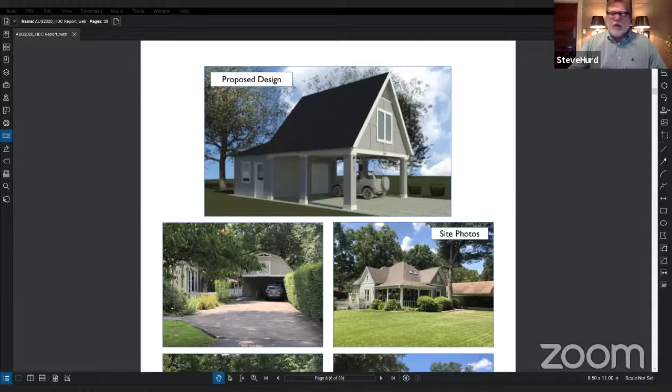Yes, we're here. Okay. This is Zach Hendricks and Bruce Hendricks. All right, so just your name and address for the record, and then tell us what we got going on here. I'll use my address, Zach Hendricks with Hendricks Remodeling. My address is 1103 Watkins Street. I guess our shop address, 1210 Hogan Lane.

That's fine. All right. Yeah, go ahead. You're good. You want to tell more about it? Yeah, just a brief overview of what's going on. This is for the public record. We've got our copies of stuff, but just give us an overview, and we'll discuss from there.

Well, Mr. Gendrich called us, and he had several things going on. One, he didn't like the way the barn shape looked, and it's been there for a lot of years, maybe 30 or 40 years, and it's also failing on the underside of the part where the cars are. It's sagged down about 5 or 6 inches, and they've had various methods of trying to prop it up over the years. So he wanted to rework the roof part.

The sides are made out of an I-beam on top of posts, and they will stay. The idea is to make it look more like the house and the surrounding area that's there. The reasoning behind the steep pitch roof is that there's a building in the back, well, they're all attached, it's all kind of one building, but there's a different roof on the back. It has an odd hip shape. And the rafters are the ceiling.

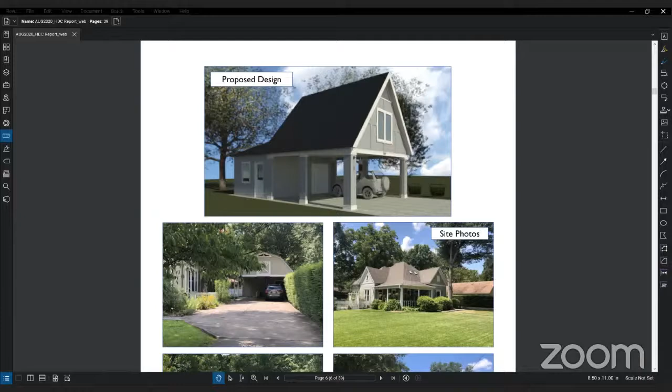Well, do y'all have anything more to say to that? Either one of you, Mr. Hendricks?

No, I think that pretty well covers it. And that's good. I mean, I'm not trying to get anything out of you. I just...

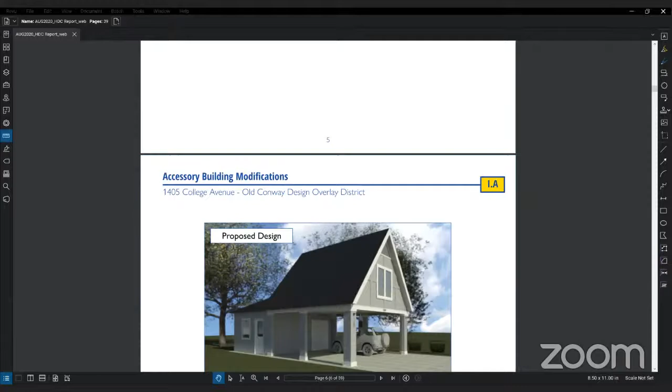James, do we have any public input on this project? We do not. Okay, with that said, then we'll discuss it. We may have some questions for you guys, so let's hang on there.

I want to say I've driven past this property. I've been here 28 years, and every day when I drive by there, it's been there - that little barn with the gambrel roof that never fit. So to me, just personal opinion, design-wise, I think it works. If you look at the reading of all the different items, it's clear that if you built it new from scratch, it wouldn't go, but it's been there. They're just refurbishing what's there, so it doesn't have to adhere to any of the zoning problems it would come across otherwise. So it's nothing better than what's there, in my opinion. But does anybody else want to say anything or add to that?

No, I don't have any discussion. I'll actually motion to approve with the staff recommendation.

Mr. Hendricks, did you all see that as far as the mechanical equipment goes, it was going to be placed in a spot to minimize the view? Yes, we have a question about that - what mechanical are you referring to? Just if there is any, it's one of the boilerplate ones that if you're going to have any, make sure it's not out in the driveway or something like that.

That's fine, no problem. If you don't have any, it's not an issue, it's not a discussion. So like I said, I motion to approve with that recommendation.

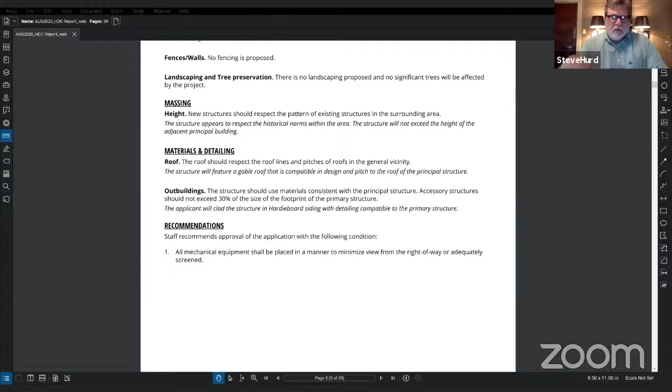That's fine. James will deal with the COA, it'll be available, I guess, tomorrow, James. Yeah, we'll get that issued. Okay, so the permit can come with that and you'll be good to go. All right, thank you all, appreciate it.

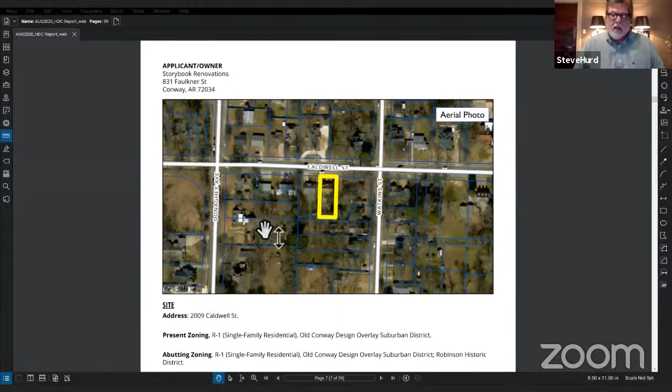Okay, next item up is exterior modifications and addition to 2009 Caldwell. I think I saw Niki gave us a comment, although she's here. Are you available, Niki?

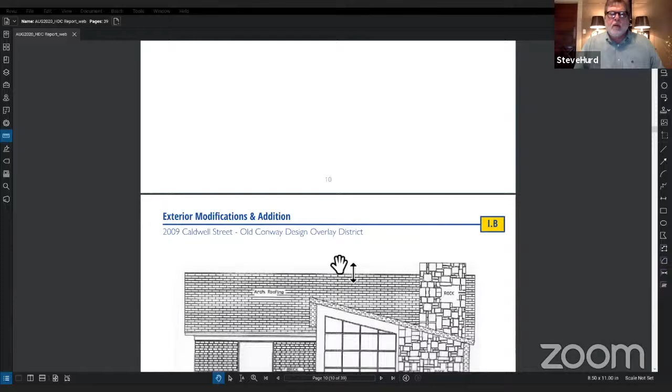Are we hearing? Can you hear me? Yes ma'am. Okay, yes I'm here. All right, just your name and address, like what you've done many times. Okay, Niki Thompson, 2759 Carl Stewart. All right, give us a little synopsis of what you got going here.

Okay, so the big thing I'm asking for is I'm wanting to do an addition off the back. Currently it's a 3-1, and so I'm wanting to add on a master bath and closet. To the front, I'm really just wanting to clean it up, take the dinky shutters off, power wash, and put a new front door - it'll be in the same spot.

I was asking if I could do a new window on the front. I truly can take it or leave it, it's just kind of an ugly window. Which window, Niki? The one on the... y'all want to keep the feature window, but yes, that one right there - it's just an old aluminum window, and it's in a prominent spot. So if I could replace one, that would be the one I'd like to replace.

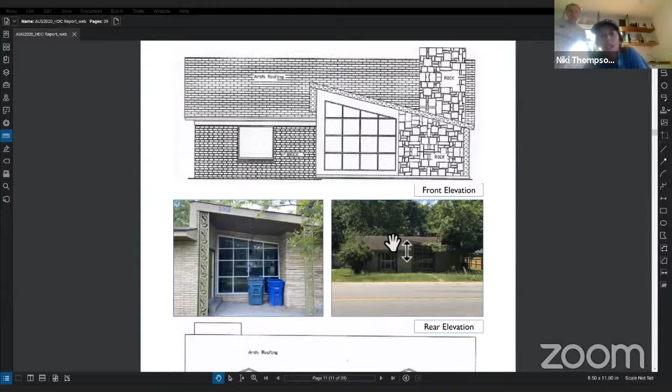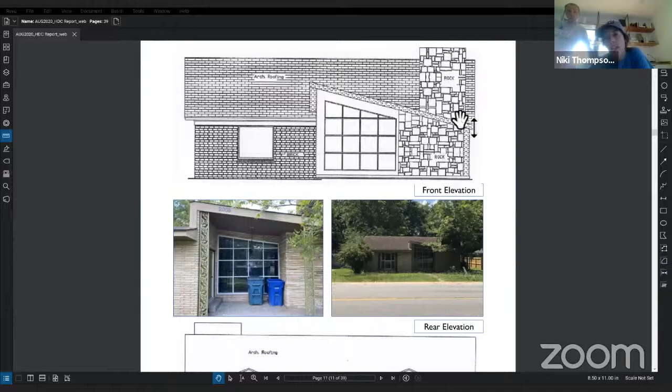And then also on the front, I want to take down the metal posts. And then, it's all rotted underneath and over on the right by the chimney - the porch is just rotted. I would like to replace that with some wood underneath, and then have it waterfall down the side on the right over there by the chimney. I have a question on that.

So will the front porch be walled in on 3 sides when you get through? I'm not real clear on that. Okay, yes, I guess it would be. Your 3 sides being the door, the window wall, and then the west side of it.

Are you wanting to put columns back? No, I'm wanting to just take them off, and it'll just have that feature from the ceiling down onto the right side. Okay, good. Then we won't be arguing tonight.

Those columns were put there by salesmen running around in the 60s, maybe late 50s, telling everyone the wooden columns were rotting, so put these up. I'm sure that came from a slick salesman, and there probably were no columns there at all to begin with. Yeah, I don't want columns.

I'm also wanting to take that lean-to off. The lean-to, the carport. I don't think it's a carport because there's no room to get under it. Yes, that right there. That was probably added at some point, wasn't it? I mean, that's not original.

So we'd end up with the east elevation just clean like it is on that drawing right below it. Yes, so in that drawing, it shows that I'm removing a window. In the back where I'll be busting through to do the addition, I'll use that brick to fill in the window.

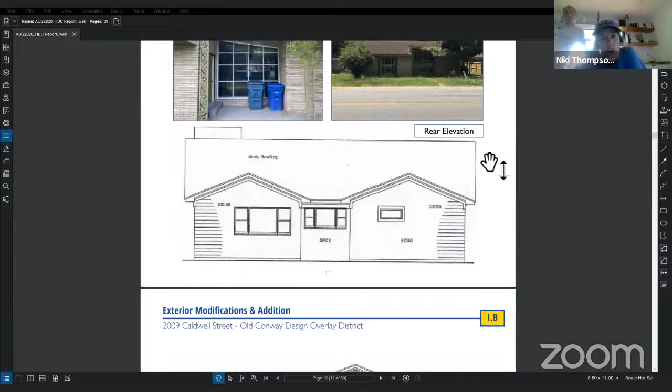If you go back down, keep going right there. If you look under the current lean-to, you can kind of see there's another window there. I'm going to close that one in.

Why are you closing that one in? It's going to be, there's going to be cabinets there. I'm extending my kitchen. Is there room to put just lower cabinets under that window? No, the windows are too low.

You can see that window there. It's pretty big. Yeah, it's a small window. You can't see it, the post is blocking it. The one you see, I'm keeping. Is it the same size as the other small one to the right there?

No, it's as tall as the single of the double that you see in the elevation below. Right, it's like a single. That little single one down the way, though, is it like that? Is it that size? No, because it's as tall as the one. Oh, I got you. So that other one is currently in the kitchen, and I'm going to keep it.

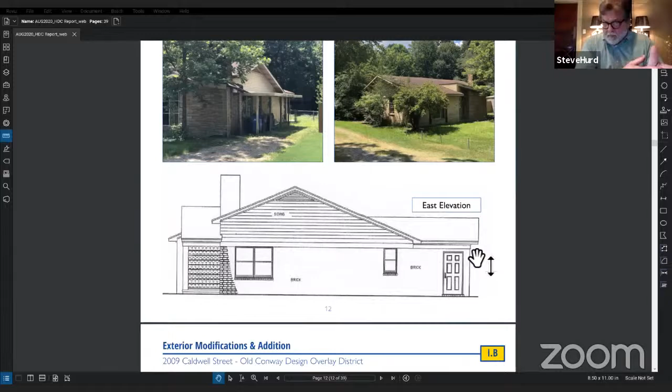But to keep that other window would interfere with the kitchen layout. I think personally, taking it out and replacing with existing brick is kind of clean, as opposed to making them put in another window shorter to match that other one on the right. I think it'd look more jumbled doing that because the windows wouldn't necessarily match. I'm not saying it's not losing a window and that it's not the greatest, but it's not going back with some odd material that's not there or that we'd have to have now. It's using existing brick, so I'd say it's kind of the best of what we could get out of doing something there.

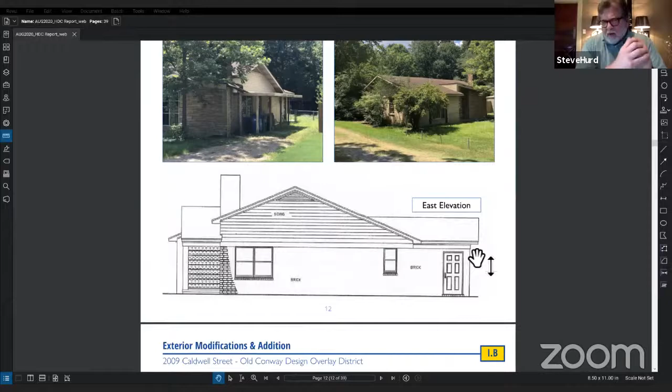Personally, from a design side, it'd be great to leave everything like it is, but I'm not sure it's a horrible thing to lose, and it's down the side of the building. I know we're losing the overhang and any shadow, you can probably see it better now, but I'm not sure how that affects the overall look by losing that. I'll fight for other ones to get taken out, but that one I'm not sure it's as much of a fight as we need.

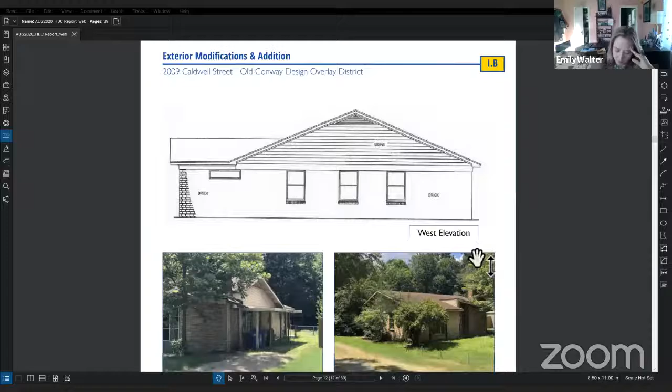I have a question about the waterfall. You know how you're going to waterfall that roof line, what is that going to look like? I mean, is it going to be wood? Yes, I'm wanting to add in a cypress, just a clear cypress, to kind of give it a little bit more of that mid-century vibe.

Is it going to be laid horizontally or vertically? Horizontal.

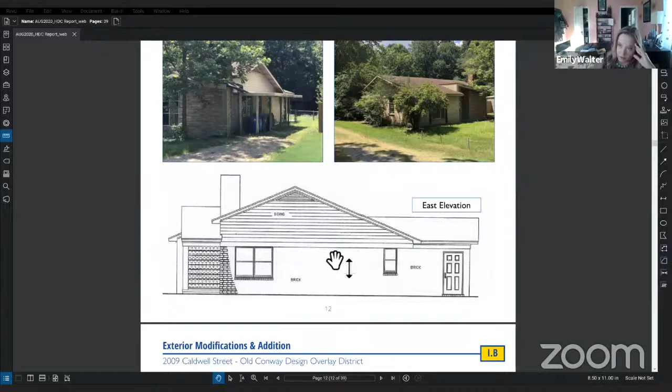And I'll throw my two cents in about the window replacement in the front. I don't mind this single one because I feel like that's going to accent the other window a lot more, right? Which window are you talking about? She's saying she wants to take out the left window and just do a single pane. Am I understanding that right?

Yes. I kind of like it because the grids don't fight with the center window now. And I was hoping to do just a single, or even fixed glass, because there's another window in there for egress in that bedroom.

Would you be raising the sill of the window? Because am I seeing on the elevation, the photo, it looks like it goes down almost to the floor. It almost does. So you're raising the sill of it with this? No, I would just keep the same existing hole.

Okay, and I truly could take it or leave it. I think it would look better to replace the window, but if I need to save money by not replacing it, I will.

I guess my thoughts, not to argue with you, Emily, but going from something divided with that big of a hole in that kind of small space, it's going to be a big dead hole without some trim, without the mullions, and it's going to look commercial. That's fine on a commercial building, but even if I were doing a little clinic or something with a window that big, I'd put mullions in it because it's such a big expanse.

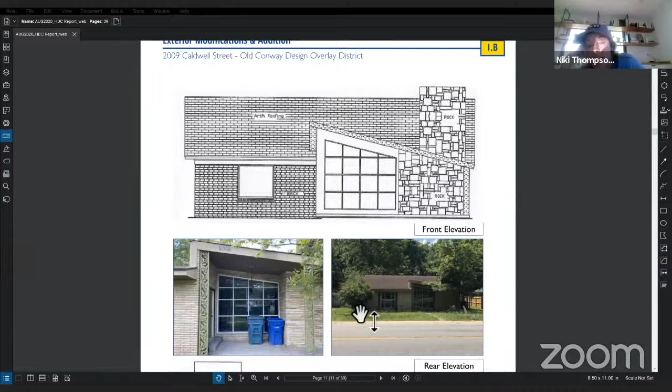I don't know. Again, I'm fine to keep it and just say, hey, I wasn't allowed to change it. But if I've got someone who really wants to change this window, or use it as a marketing tool -- it's an original window, it goes with the house. I'm being a little silly, but at the same time, it's going to be hard for it to look like it goes with anything else you do. A regular double hung window, or a pair of them, still won't match that style.

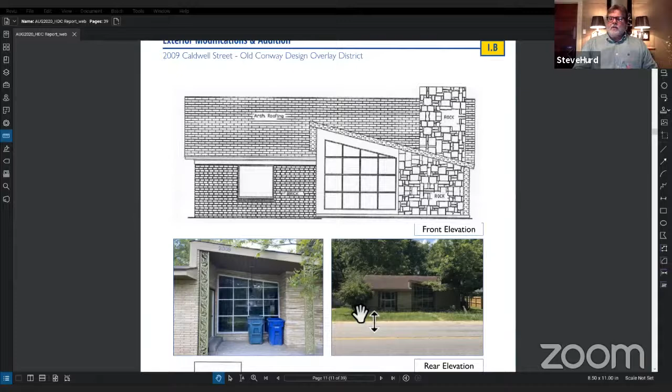It's in a very big style house for that era. Yeah, absolutely. It's a handsome little house for that era, and we don't have many like that around. Right, and I'm thrilled to kind of start poking away at it.

I'm moderately leery of the waterfall thing, but that's not something that kills it for me. I'm okay with that, just as we talk about design parts, but for some reason that window would kind of deaden the front if it went to anything but broken up like it is.

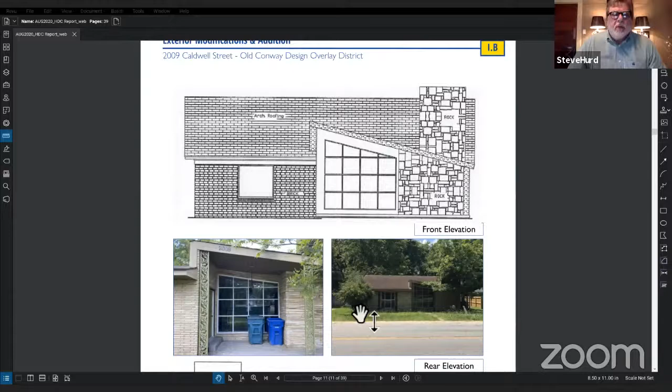And I don't know if they're trying to line up -- if those mullions line up with that big porch, that might have been an attempt, but I can't tell from here with the picture. Well, that's fine, we don't need to. We can move on, I'll just keep that window.

Okay, all right. I will say, like you said, you're moderately leery about the waterfall. I'm very leery about it, to be honest with you.

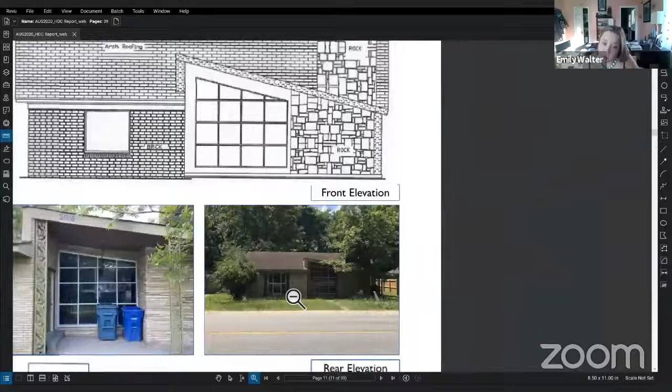Whenever I heard that somebody was buying this, I thought, oh my gosh, I hope they don't change it. It's such a unique house, and it's one of a kind. And I'm not crazy about changing it.

So let me just say that when I saw the house was up, that something was happening to it, I was like, oh, I hope it's Niki. I know that if anybody's going to do this house justice, it's going to be Niki down in Storybrooke. I know that the waterfall might be a little bit intimidating, but I feel like it fits with the time frame that the house was originally built, and it also will fit in updating the neighborhood and giving a fresh vibe to what is already a really rich street in Conway. So I'm all for it.

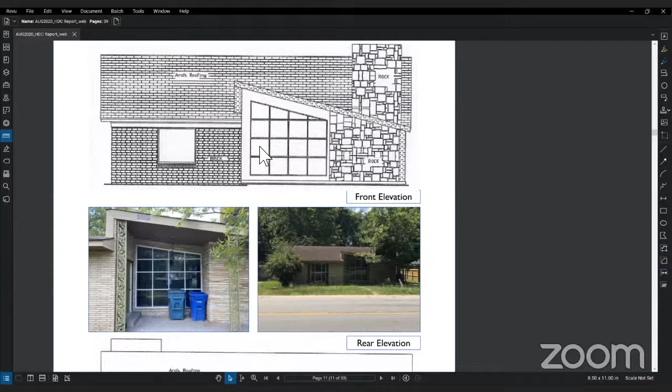I speak highly about Niki and her work and all the things she says about this house, I'm excited about. Well, Emily, I kind of lean towards Liz a little bit on that opinion. The two parts that could change on the front of this house: one is the window, one is the waterfall thing. If the waterfall is there, it's continuing a shape, a flavor, if you will, that's there, as opposed to putting a little handrail at the end, just a porch rail that defines the porch, which could be done and not look like it's supposed to. That's not totally out of line, in my opinion, and I think Liz's too.

Breaking that window out and putting something contemporary now would look really out of place. My opinion is that the waterfall is in the appropriate range of continuing the design style.

I agree. That's why I was asking what direction it was going to face. I agree with all of it. We need to make sure - we don't want to say okay on something and have it happen where we didn't quite understand what was happening and it comes back to haunt us. But I think we're on the same page.

Does everybody agree? I have a question, and this may be a stupid question. When you say waterfall, are you talking about an actual waterfall, or is this a term for something else? Just a term for something else.

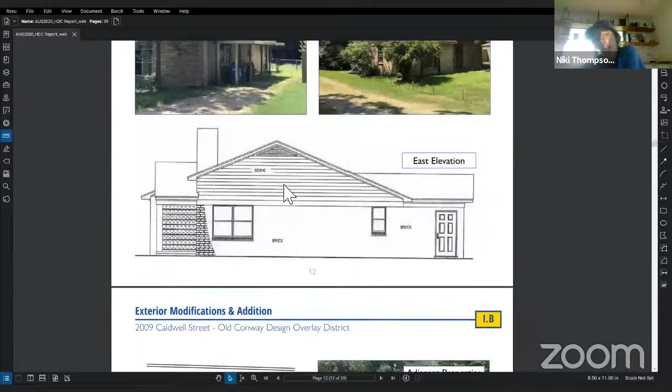So the wood - I'm sorry, I'm having a hard time describing it - will clad the porch ceiling in that same monoslope that's currently there, and then it will just continue down the side on the right. Okay, gotcha.

Margaret, if you look at the front at that porch - I can't scroll, keep trying to scroll the drawings - the porch that's there now with the columns, but on the left side of it angles up, then turns sharply down. She's going to basically at the other end angle down and turn sharply down with structure, with a wall. Is that right?

In that picture to the left where you see the two metal columns, it's almost like I'm going to run horizontal panels across those. So it'll just waterfall to the ground.

I wouldn't mind seeing a clearer drawing of that, if it's not too much trouble. Is it showing up and we're just not seeing it in the drawing? Well, I attempted, and I don't think it made the drawing or this form. I attempted to, and then the draftsman - that is his attempt. I can try to find something on Pinterest, but I don't know. I think I've just seen it in my head. It looks really good in my head.

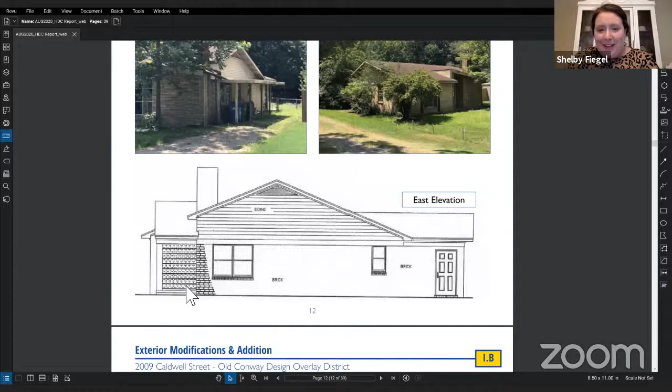I have lots of good in my head too, Niki. But I guess the best way to see it is above, where it shows the front elevation of the house with that draft drawing. You can see where the roof runs, and then the same material is used to drop down kind of to make a wall. It's in the draft, I just think, like you said, it's not coming to life the way that we probably want it to.

Well, the only thing that I worry about, especially if we're taking that wood to the ground, is that we make sure the wood is - and this is my detailing coming to light - not put in jeopardy when it comes in contact with moisture and stuff. That's all I have to say about that.

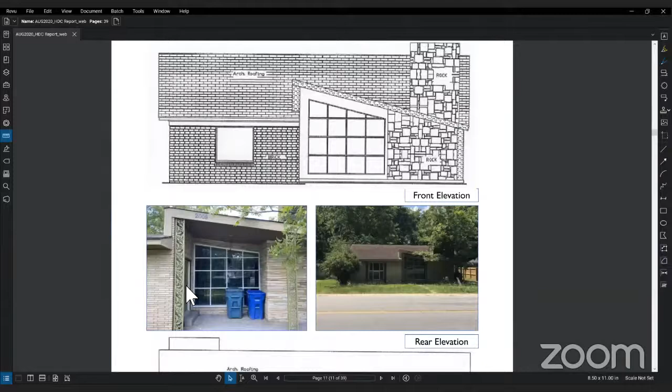Yeah, I thought about that. This is crude, but can we see that? Is that what you're talking about doing, Niki? Yes, sir, yep. Do they see that?

That bold line, the bold thickness, that's the roof going down, and she's going to turn exactly down that way. Is that right? Yep, that's exactly it.

That didn't seem too hard. Is everybody clear on that? I can show you that picture again, but that's what I was seeing. I'm glad to know what it is.

Niki, I wanted to clarify, so you're not proposing any columns on the front? That's correct. That's what I was going to clarify too, James. So that eliminates staff recommendation number two because there's no new columns.

Let's take it off so it's not confusing. Can I make a motion to approve with staff recommendations with the exception of striking recommendation number 2? The column recommendation, that's number 2, is that right? You're right. Okay, yes, I make a motion to approve.

Okay, I have a motion. I'll second that motion. I got a motion and a second for that amended recommendation list. Just real quick, Niki, you've seen the recommendations, correct? Yes, I had questions too because I wondered if they were for me because of the columns. But I think everything else is fine, except I'm not doing number 4, replacing a window on the right elevation.

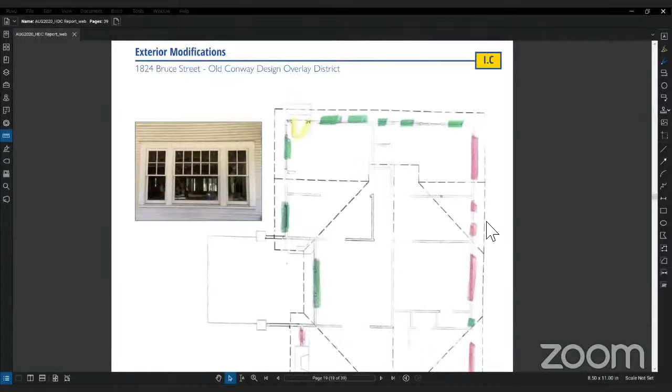Okay, that's fine, didn't know you were living at the house. All right, so the exterior modification, I think you guys have probably all taken a look at it. What we're here tonight to talk about is the windows we are going to be replacing and moving the front door to the right, the original front door.

Why are you replacing the windows? Well, there's a couple of reasons. They are pretty deteriorated, and they are not energy efficient at all. And at this point, it's just the back and part of the side.

When you say deteriorated, what is that? Have you had anybody look at them to repair them at all? Yes, and part of it has to do with the interior remodeling of the house.

Just when I had the architect do the new plans, we needed to make some changes on the window locations.

I drove over there today and I didn't notice any deterioration on the outside, so that's why I was curious as to why you were changing them. They're just so pretty. Well, none of them are being changed that you see from the street or the driveway. That side is pretty visible though.

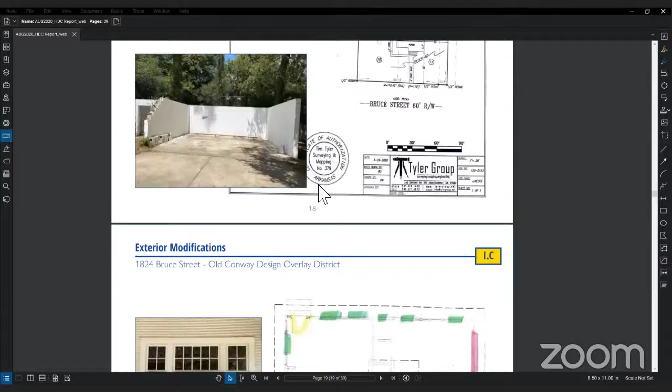Well, I don't know if you're looking at, so the pink is where all the original windows are staying. That's the driveway side and the front of the house. To clarify, the driveway is on the right side of this drawing. Oh, the floor plan, okay.

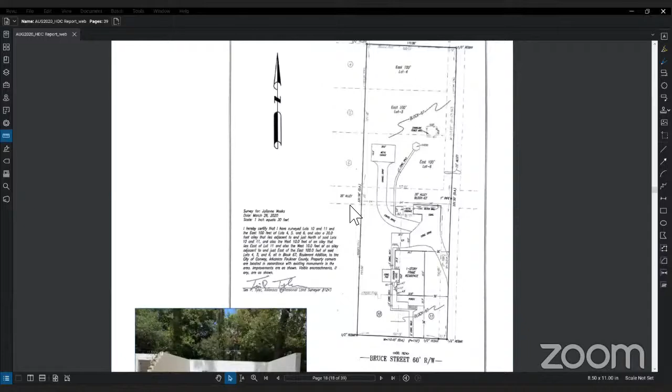Windows are a discussion point, but also just to add in there, why is the door moving 2 feet? Well, it's really moving over a little, as far as basically the size of that door, which is 30 or 36 inches. It's just to center it, and also with the floor plan modifications, it better fits in the room.

Is the plan that I'm seeing the floor plan that's going to be built? Is that going to be up against a wall I'm seeing? Let me go back and let me see the picture. Yes, it'll be to the right of the wall, so it opens onto the wall.

It just seems to change the front of it, which is a handsome house, and then just to scooch it over less than 2 feet or so, I don't know, that's a lot of suffering for a little bit of floor plan thing inside.

Well, the floor plan, there's kind of an entry, it's still an open room. In fact, we're adding kind of like some craftsman little columns there to the left, and it makes it more livable.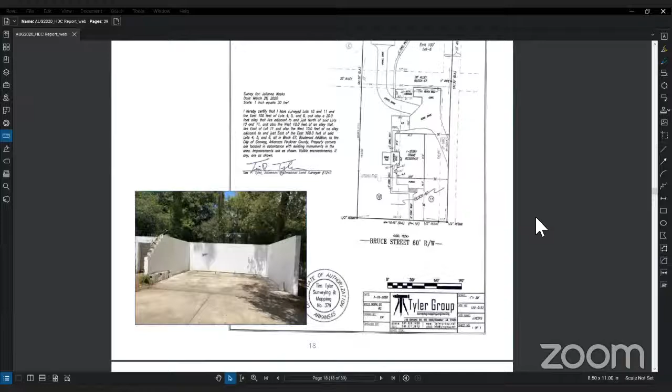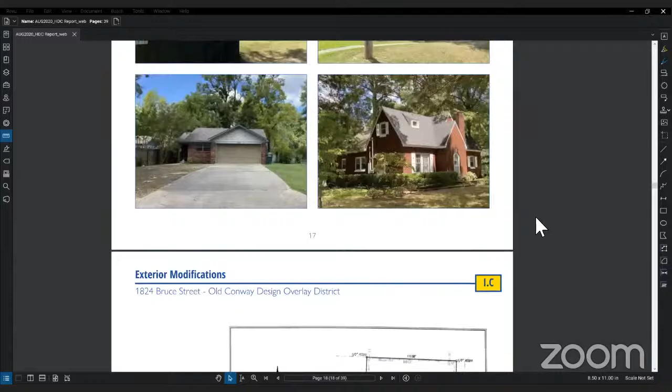Because what you're actually seeing there on that floor plan is not the floor plan, that's where some of the original walls are right now. That's what I was asking, I couldn't tell, sorry, I'm looking at that.

Okay, not to bounce back and forth, but back to the windows and energy efficiency. If that was our criteria, we'd have to rip out every window in town, in the old part of Conway. But they can be repaired and be very efficient, the single pane doesn't mean anything as far as efficiency.

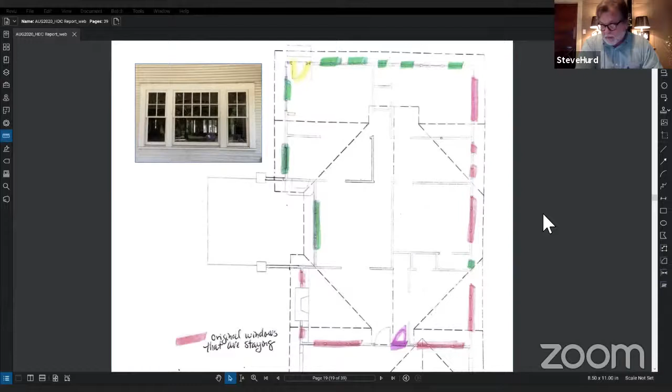But have you considered storm windows? And I don't mean big clunky aluminum storm windows, but I know there's a couple of different people in town that actually will make those, and they're priced very competitive with even just replacing windows.

So I don't know if you can see the back, there's a picture of the back of the house, and this house has double hungs and casements. The double hungs are actually in great shape.

The casements on the back of the house, part of that is a floor plan change as well, where you have the little bitty short windows that were over a kitchen sink, and that's not going to be a kitchen anymore.

Is that the photo? I see a photo with a dumpster in the foreground, is that ones there? No, those are all staying, all the ones you see with the dumpster are staying. The picture with the 4 little windows.

Well, okay, so in the back, it's the back of the house that you can kind of see where a deteriorated kind of carport is. Yeah, it's our first picture at the upper left. Yes, that's the one, I got you.

Okay, so those 4 windows underneath it, under the carport, were over a kitchen sink, and that's not going to be a kitchen anymore. So we're putting larger windows there to open toward the back. This has a beautiful lot in the back, and you really can't see it right now from the back of the house.

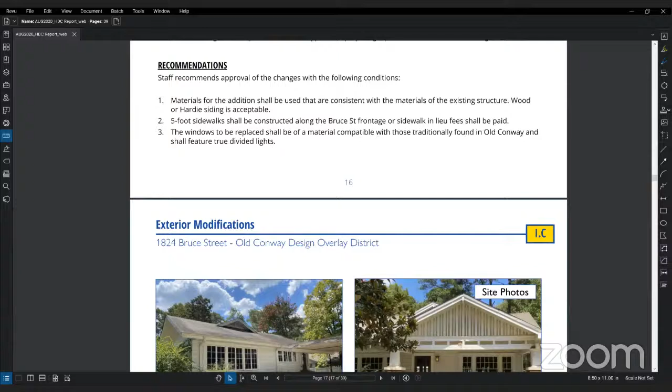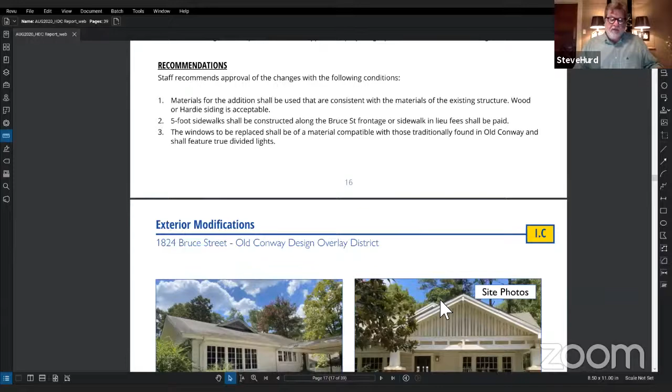Okay, all right. Next item we have is the new single-family residence on 517 5th Street. Do we have anyone here to speak to that?

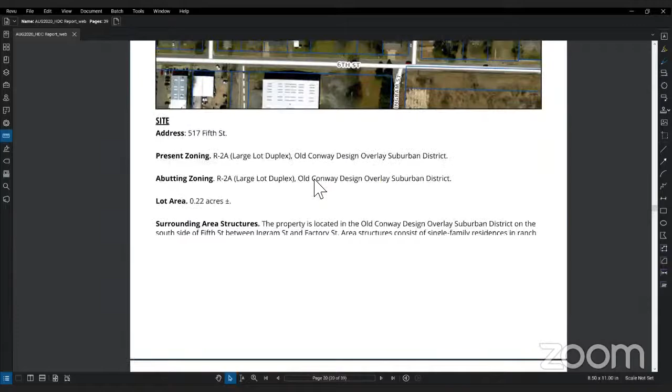Yes, we're here. Can you hear us? Yes. I'm Holly Strangland. We would like to build a— let me interrupt you, I'm sorry, I apologize. I got to do your address where you live. If it's at 3035 Crawford, that's fine. Yes, 3035 Crawford here in Conway.

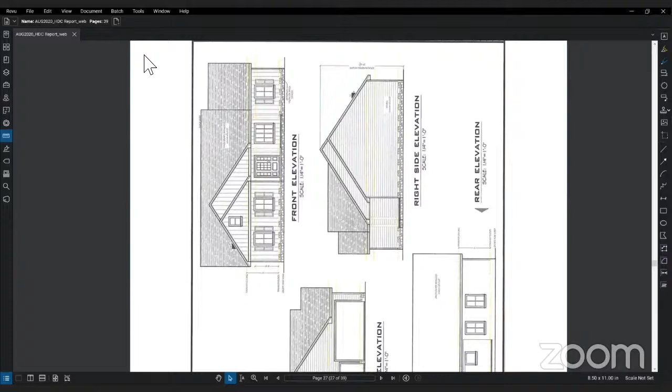We've read the recommendation, so we have some questions, some confusion. I don't quite understand the garage issue. It's a side entry. You can't really tell from the front of the house on the elevation view that there's a garage there. You would only be able to see it because of the driveway.

Well, I will say just from design and layout, with the garage up front, side entry or front entry, you're going to have a whole lot of concrete. First off, you're going to have a big apron to turn into the garage and back out, and a wide driveway coming up to it. When they're set back, like a multitude of homes historically have had, if they had a garage or carport in the back, it was a narrow driveway back to where things were parked. So while the garage is there out front, the door is on the side.

What comes with that is a large landing strip and pad that we're trying to avoid—those exist already, a lot of them, before we came along, as far as trying to maintain the neighborhood that's been historically around. They're built a lot out West Conway, lots of subdivisions, that's what they've got, but we're trying to hold to kind of the historic standard with that. So back, halfway back of the house or further—it could be a straight driveway into it, but you start out narrow and get back to the pad further back. That's one of the reasons we push it back, to keep all that concrete down. Well, a lot of the homes in the area don't have garages, they have concrete parking pads, tons of concrete.

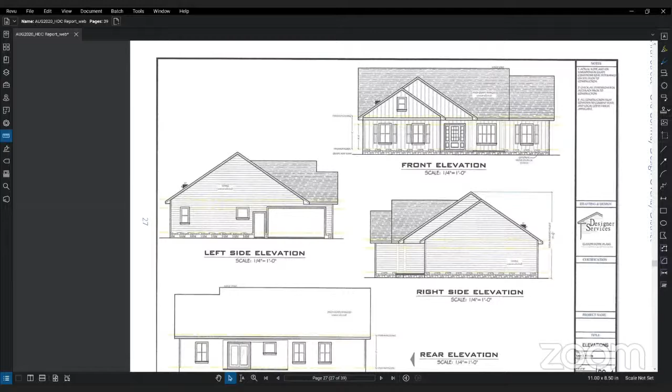The front wall where the garage currently is, the part that sticks out, if we were able to push it back - we can't go all the way back to the porch, we'd lose the gate and that other gable end. But if we could keep it out maybe a foot or 2 feet, you could still have a gable, but it wouldn't stick out as many feet from the garage. There's nothing wrong with one gable and the porch being under that gable with some columns, and you've got a porch and the windows of the bedroom on the same face as the door. Having the little step-out gables a foot or 2 feet, that doesn't necessarily help.

I don't know, it's just sometimes it's done, kind of forced on things. But a single gable with like 4 columns across it, with the door and the windows just like that - we have a minimum of 6 feet as far as porches go. That's where you start getting to what we're talking about.

Okay, that's what we need to know, so we don't keep doing this month after month. I understand, and you asked the questions, and we're here to talk about it. Yeah, that's what we're doing, so that's not a problem. I don't mean to sit here and lecture everybody.

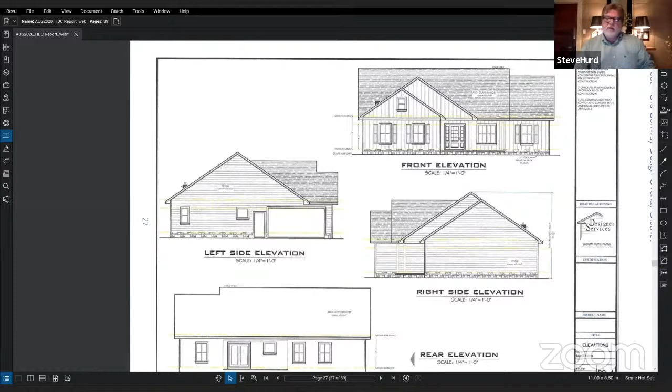No, and I do have a question, this is more for information, and maybe other people might wonder this too, but I don't know if you can tell from the pictures of the property and the adjoining property.

There are 2 things I question also, one is the planting of trees. There's nowhere to plant trees. That huge crepe myrtle we purposely tried to save - the trunk is over 4 feet in diameter, it's got a 30-foot canopy, and it runs into the canopy of the trees on the right side of the property. On the left side of that crepe myrtle is where the water meter is located, next to the driveway. So where are we supposed to put 3 trees with overhead power lines?

So I just question that also. Well, James might be able to address that better. I know that's a regulation, an ordinance. James, do you have any comments on that?

Yeah, I think we could consider the crepe myrtle as one, you could just vary where the others go. Okay, we went back and looked at it yesterday, and by the time you put a house, the crepe myrtle, the canopy of the other trees, and a water meter, I'm not sure where you'll be able to put another tree. Yeah, we could likely even put it in the backyard.

Okay, and then I have a question about the sidewalks. I know with new construction, the ordinance requires you to put a sidewalk in. There are no sidewalks on either side of the street, and again it would be a sidewalk to nowhere. On the left-hand side you can see a utility pole and a telephone pole thing there, so the sidewalk would just go nowhere.

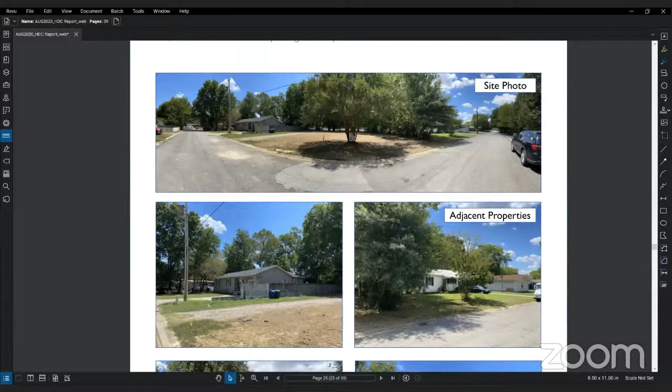And we're completely fine with paying the in-lieu fee. There are no sidewalks on that entire block, on either side. Yeah, and we come across this a lot. A lot of times there are sidewalks that are all torn up because of tree roots, and that gets replaced, that's fine. Other times, just like you, there's nothing on the block, and that's more of a discussion.

Well, if you're offered the chance to pay in-lieu fees, people usually do that. So staff would support not doing the sidewalk, in-lieu is fine. Of course you have the choice of doing a sidewalk or not. Again, the argument is there's a lot of places where there's nothing there, sidewalks to nowhere on both sides. So we understand that, that's not a problem. James, staff supports in-lieu.

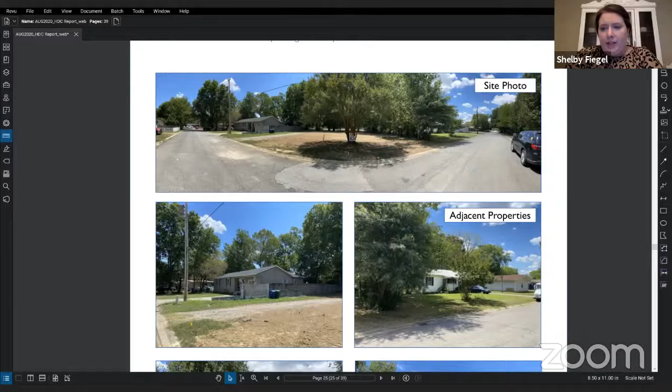That should have had the in-lieu fee included on number 5, correct? Yeah, we weren't - I mean that wasn't put on ours at all, we were told. Yeah, gotcha. I think that was probably just a mistake, so we can change that. Yeah, that's normal, James, it's just to give them the option, right?

Yeah, I just said that basically to dictate that there's a sidewalk requirement. We can switch on the in lieu fees or not. Does that answer your question on that one? Yeah, it does. So we're here to help, not to hammer you in the head.

Well, while you're here to help, I have another question about number 2. Only because if we go with the same house plan, I only want to have to redesign it one time and come back with it. I have a question about this whole window thing in the front, because in the write-up, it was told the windows were okay.

Under facade, wall area, and rhythm, it talks about 21% windows and openings, but then says it appears to be appropriate. I know we need to add windows on the side, and we're fine with that. But in one place it says it's appropriate, and in another place it says we don't have enough windows on the front.

Okay, in reviewing that, basically it was saying the way it is, if the commission were to approve it as current, I don't know where you would place more windows. If it's redesigned, then your target is 25%. Usually that's something like a vent up top or some kind of small architectural feature that creates a void that can count as that window, usually gets you to that 25%.

Yeah, I think it's pretty straightforward. With these houses of this era and the tininess that they built into them, it can cramp you at some point, which looks like they're going to correct. So, everything's to the back.

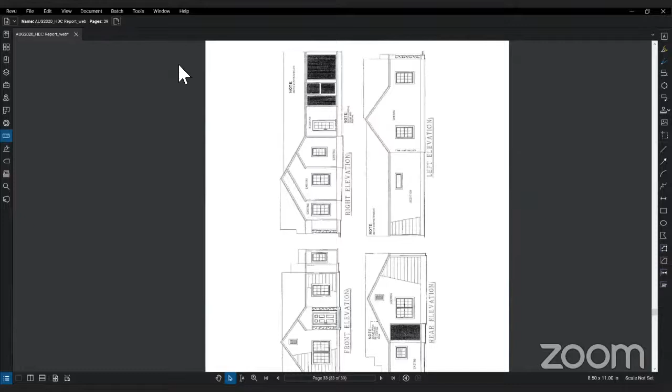Have you seen the recommendations that staff put down? Yes, sir. I wanted to address number one. There is no tree that's going to be impacted. Okay. But obviously, if we do, then we'll sure take care of that. Those two out front and the house itself is just a nice little picture. If the house was a little cleaned up, but otherwise...

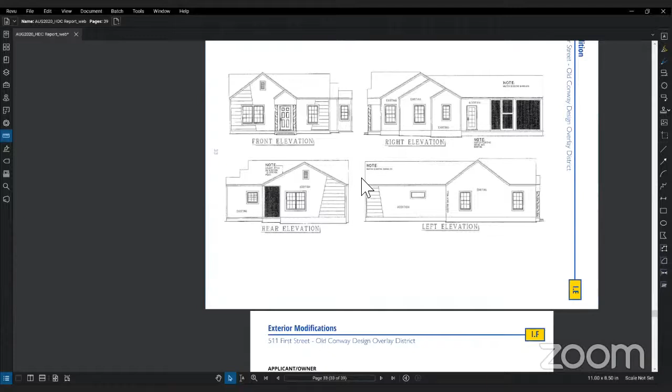Well, and we do plan, of course, to repaint the entire structure, and probably, depending on budget, we're probably going to just re-roof the whole thing too to make it uniform. Okay.

So I noticed in there he said it had vinyl siding. I think it's actually an aluminum siding, but we're fine with using the wood or the Hardie product on the addition. Okay, on the siding. Yes. Okay. Yeah, all right. Well, we appreciate that. Okay.

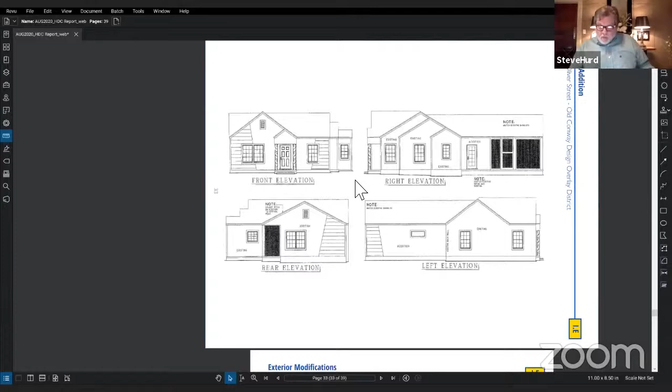There's not much meat to this, especially if you're not taking any trees out. That's easy. The windows, just some 1/1 windows are fine. We don't have to go to the divided light stuff if you don't want to. And then the HVAC equipment, if you have any new that gets placed on the ground, just not visible from the street. That's pretty standard stuff.

Yeah, we are going to have to relocate the condensing unit, but it's going to be at the very rear of the addition. So okay, well again, number 4 says equipment be placed in a manner to minimize its visibility from the street. That's if it's behind the house, fine, a little fence, whatever. Just as long as you keep it out of sight, and it sounds like it will be if you go to the back, so that shouldn't be a problem.

Okay, all right, anybody else have any questions or anything? I think, like I said, it is pretty straightforward. I'll motion to approve with recommendations.

Thank you. All right, we have a motion for approval. Second. All right, that was Liz, correct? Emily. Emily, I'm sorry, I thought my little thing popped up funny. Okay, so motion is seconded. Any other discussion?

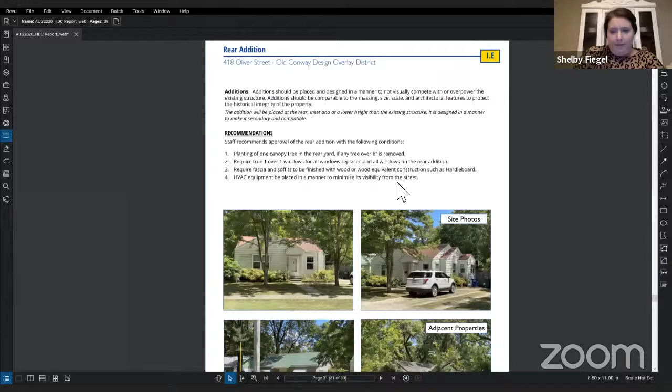Nobody? All those in favor? Aye. Aye. Aye. Any opposed? All right, okay, thank you.

Yeah, the COA will be available tomorrow, as early as tomorrow, and then the permit can come after that once you get that. So, thank you much.

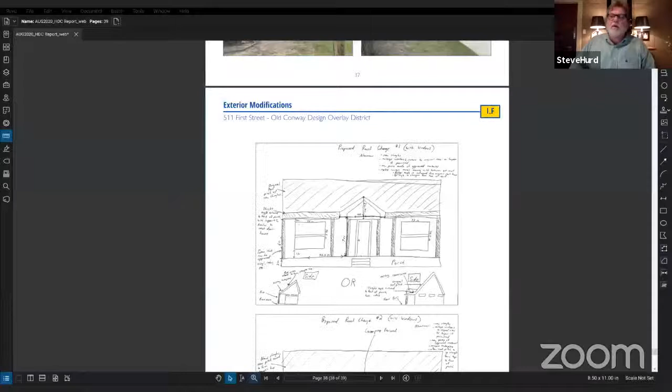We have a Mr. Kingard. Yes, that's me. Okay, all right, if you give us your name and where you live, we'll get going. My name is Colby Kingard, and I live at 11 4th Street, Greenbrier.

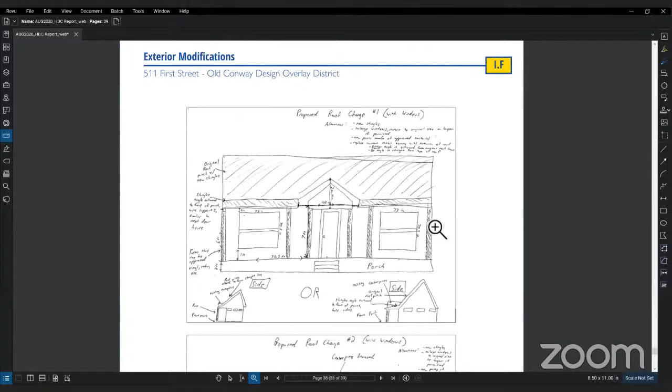So this is my first rodeo, forgive me, but my illustrations here look like child's drawings compared to the other ones that have come up. Basically what we're looking to do, you can see it better in the pictures. Over the porch there is a metal awning that's pretty rusted, and we're looking to replace that with basically an extension of the roof. We're already looking to replace the roof with new shingles, and have the same material extend out over the porch, similar to the house in the bottom left picture, or the bottom right, as those are both right next door, but they serve as pretty good illustrations for what we were wanting to do.

Along with that, the supports that would hold it up, we'll take whatever y'all would want to approve. We'd be happy with any of it. We had proposed maybe some kind of wood, but if it needs to be more like those next door, that's completely fine. Have you seen the recommendations? Yes, it said wood, but I just wanted to bring it up that we're not saying it needs to be wood by any means. If that's what y'all would prefer, it's fine. Whatever works, basically just whatever will get rid of that metal that's there now. That'd be a sledgehammer, but anyway.

And then the other thing is the front windows there. You can see the two short windows that are up high on the front. I did provide some pictures, I don't think they're in this document, but the spacing for the windows is already there on the interior of the house, and I provided measurements of that. We're just looking to enlarge those windows back to the size they used to be at some point in time. So they infilled those windows and kept the air conditioner in the wall. Yes, and we would like to get both of those front windows larger, like they should be. Yeah, you can tell from the inside that they used to be large, and then someone made them small at some point.

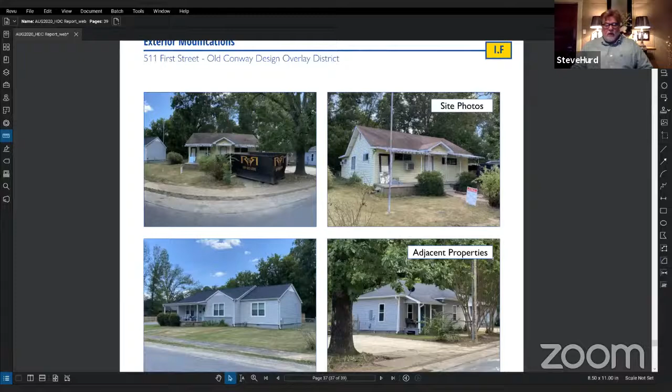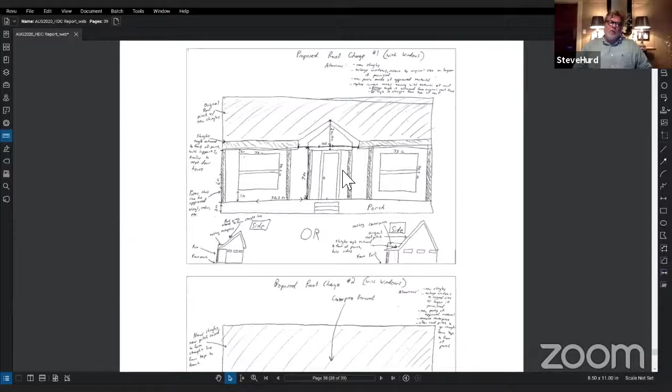Did you have any other? We got the porch, we know we're gonna take the awning piece off, and the other recommendation was option 1 of your lovingly drawn elevation. That number 1 is what the recommendation uses, so we keep that little porch, that stoop cover on the front, and you coming out to the face of it with your roof extension. I think that would finish it off nicely with some wood columns, I think that's where they're wanting to go. So if you're okay with that, no argument there. And then we got the comment about the windows, the columns—does that cover what you're wanting to do?

Yes, it does. I prefer option one because it saves me money anyway. True, that's true.

Any other comments from you, Colby? I guess one question - can you tell from the front picture if there's any recommendation or requirement for me to clean up the front yard? See those two bushes in front of the house, and another bush on the top right picture, and one in the middle. Would I be allowed to get rid of one or some of those if I felt like it?

James, you want to answer that as far as landscaping? We're mainly focused on trees, so obviously don't cut down the big tree in the front yard. Type of bushes you want to plant, that's fine - if you want to take some out, put some in. We don't dictate color and don't go crazy about landscaping at that level, but trees we do get particular about.